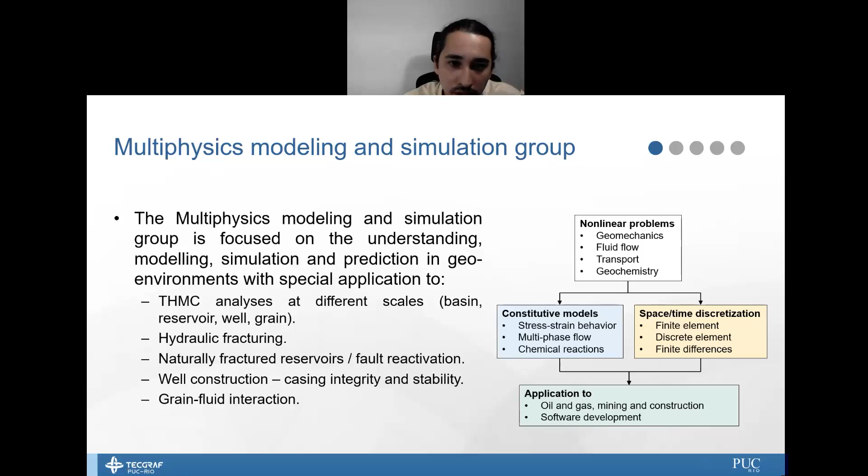So, moving to the topic of the lecture, hydrocarbon production triggers significant stress changes in the reservoir and surroundings, especially compaction, subsidence, and related problems. There are field problems related to that, and this scenario can be even more adverse in the case of karstified and naturally fractured carbonate reservoirs. This is the case of the pre-salt reservoirs.

These reservoirs have as cap rocks evaporitic formations and mainly salt rocks. Salt rocks present a meaningful creep behavior and very low, essentially no permeability, and they are useful as hydrocarbon barriers.

This is, let's say, a sign or an evidence of hydrocarbons when we find salt in the lithology, but also in storage medium, geological repositories. These capabilities, the creep and the very low permeability, make such rocks adequate candidates for geologic barriers in case of well abandonment.

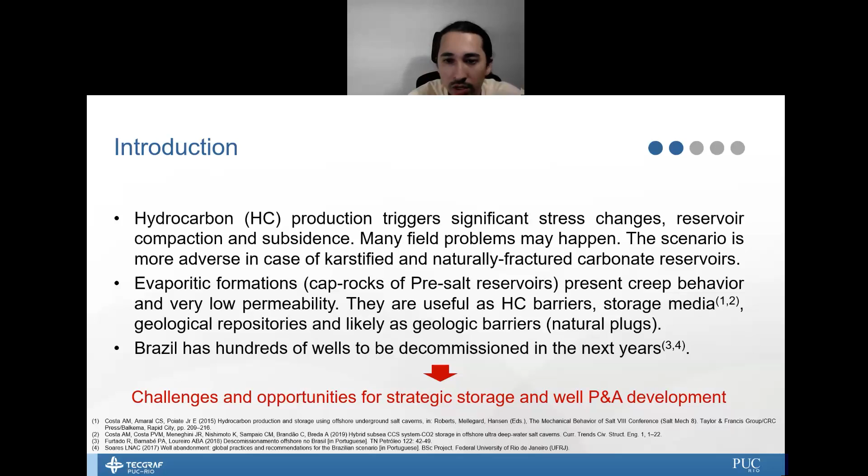So let's see some aspects on the multiphysical behavior of salt. We observe four main physics: the mechanical, thermal, hydraulic, and chemical. When we are talking about salt, we usually think of salt creep, so we are talking about the mechanical behavior of salt.

But this mechanical behavior depends on the thermal behavior also, because creep is thermally activated. So we have this coupled thermomechanical behavior. And considering that, we may have some repercussion on the hydraulic behavior when we are at a level of stresses and accumulated strains in which the volumetric strains are no longer negligible. So the rock undergoes dilatancy, microcracks open, and these open microcracks become flow pathways for fluids, and with that we have percolation.

With percolation, depending on the chemical compatibility between the salt grains and the percolating fluid, we may have reactive transport and dissolution. This is the way how, in general lines, the thermomechanical behavior relates to the hydraulic and the chemical behaviors.

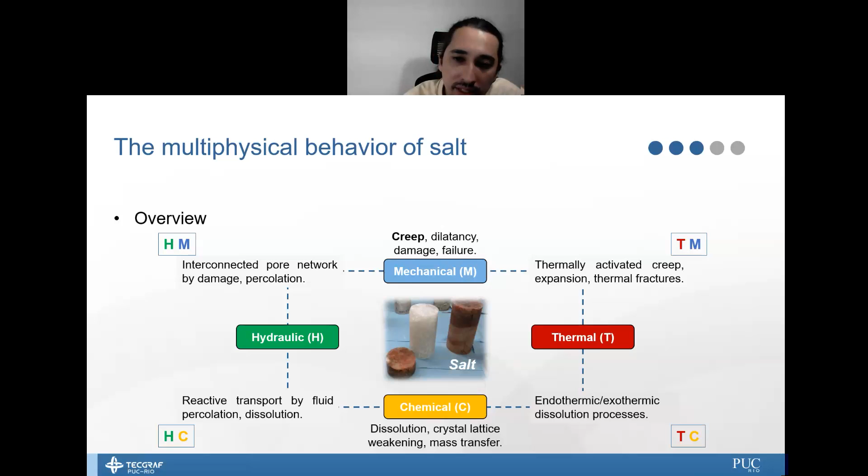But for the scope of the lecture, we are focused on the creep behavior and eventually the role that temperature plays on the creep behavior.

Considering the thermomechanical behavior of salt, our first observation is that mechanical behavior depends on deviatoric stresses, temperature, and time. So the constitutive models for creep need to consider stresses, temperature, and time.

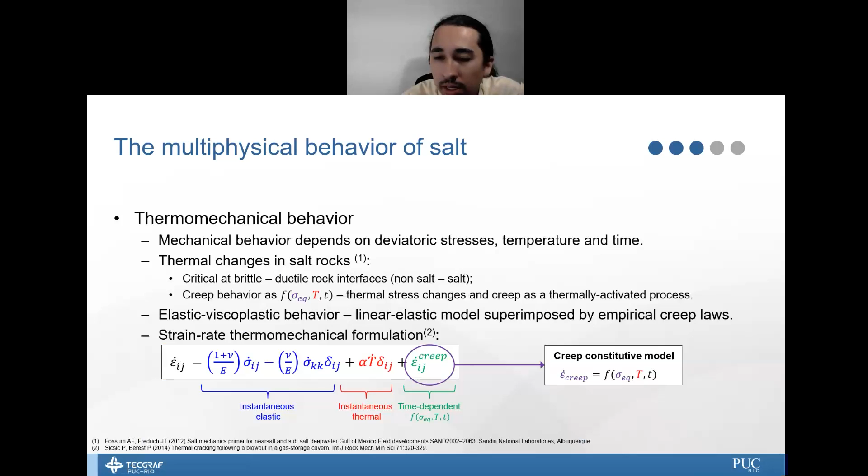The expression you see in the slide describes how strain rates are usually formulated in salt, considering a thermomechanical behavior. We observe there is an instantaneous elastic contribution, an instantaneous thermal contribution, and a time-dependent contribution. This time-dependent contribution is exactly the creep contribution, and it depends on the constitutive model we are adopting to formulate, or to quantify and predict, the creep deformation.

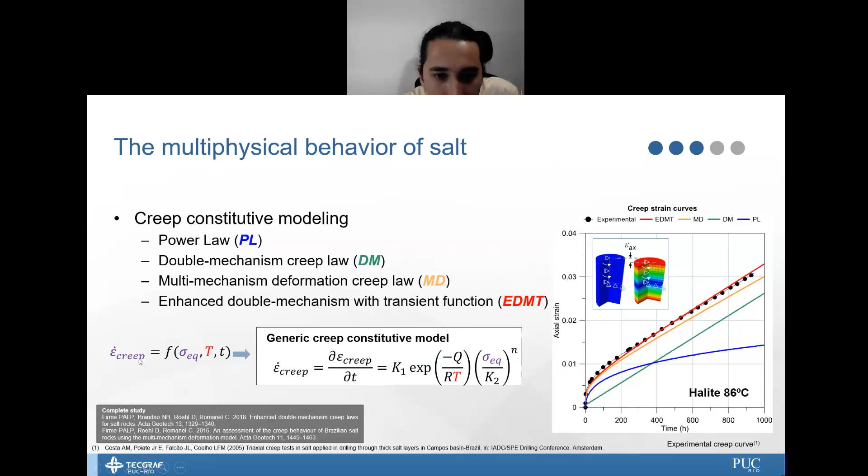Considering dilatancy behavior, which is crucial for the repercussion of the mechanical behavior on the hydraulic behavior, salt accumulates high creep strain levels before exhibiting macroscopic failure. But if volumetric strains become relevant, the material undergoes dilatancy, and this is why controlling dilatancy is important.

Once the salt undergoes dilatant behavior, there is the opening of existing microcracks and likely the generation of other microcracks, and there is an interconnected pore network that is responsible for enhancing the permeability. So salt is no longer impermeable. This is a problem considering salt as a medium with hydraulic isolation.

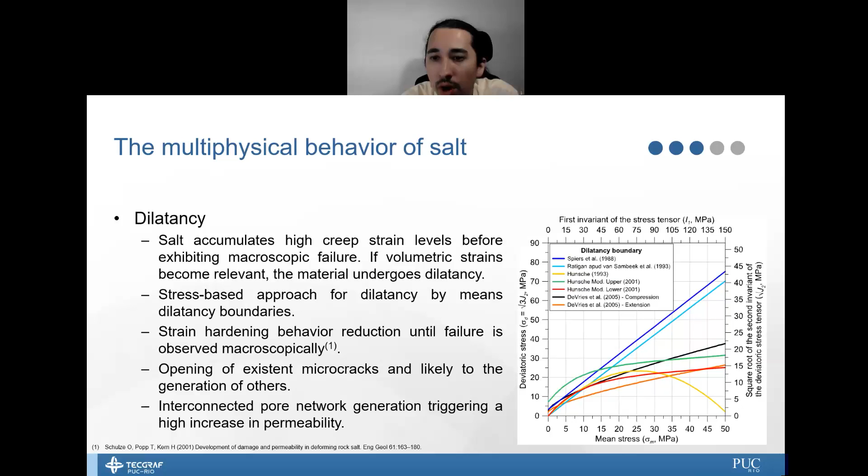So let's see some applications, starting with salt caverns. Firstly, there are some specifications that apply to all the models, results, and simulations presented in this lecture.

We are adopting the finite element method using the commercial software Abaqus, the enhanced double mechanism creep model, and either axisymmetric or 2D elements. We are not considering 3D analysis here, but in both cases we are adopting quadratic finite elements, 8-node quadratic and quadrilateral elements. There are some capabilities which are not originally available in the software.

So we had to prepare Fortran subroutines to make them available. We have prepared the EDMT creep model in a subroutine and a transient internal pressure to simulate the cavern construction and operation. These two capabilities we have coded and are using in Abaqus.

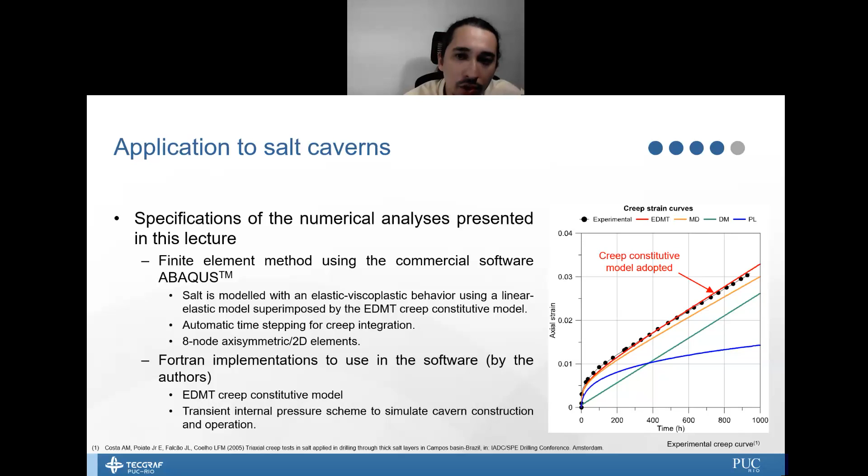Considering this model of salt cavern, the goal is to evaluate the mechanical response of an offshore synthetic model of a salt cavern regarding salt creep, dilatancy, and stress paths during construction and operation periods.

So we have a typical model considering a pre-salt lithology, and the cavern is opened by solution mining, which is a dissolution process, but we are modeling it here using a mechanical transient pressure. It is a simplification of the process, but it seems to be working well.

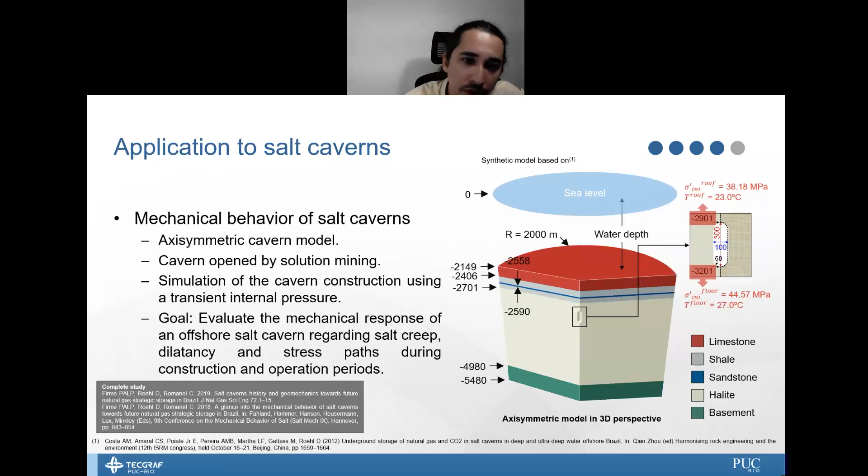And we are simulating the construction and operation periods of the cavern. Here we have a workflow to simulate the cavern construction. We are modeling the solution mining process using a mechanical equivalent approach.

So we have a transient pressure scheme that simulates the cavern opening, while reflecting the transition from salt to brine by dissolution. So this gradient of the pressure changes in order to reflect this dissolution process.

And then we have the debrining and first filling processes, which represent the brine being removed from the cavern and being replaced with gas at maximum pressure and then at minimum pressure. So in a few words, this is a workflow for a numerical simulation of cavern construction by solution mining using mechanical pressures.

And here we observe the stress changes provoked by this simplified solution mining representation of the cavern construction. In the end, we have a deviatoric stress of about 20 megapascals.

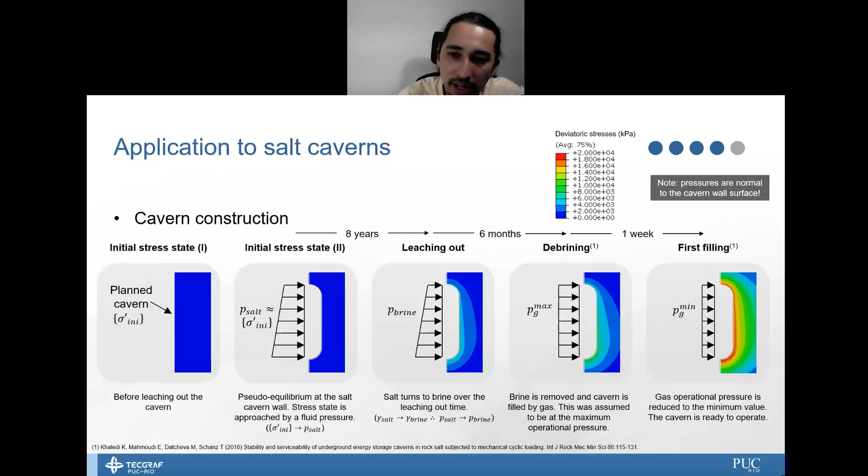So there is a perturbation. This is expected in the field since we are unconfining a significant region in the subsurface, and these deviatoric stresses are responsible for triggering the creep behavior of the cavern.

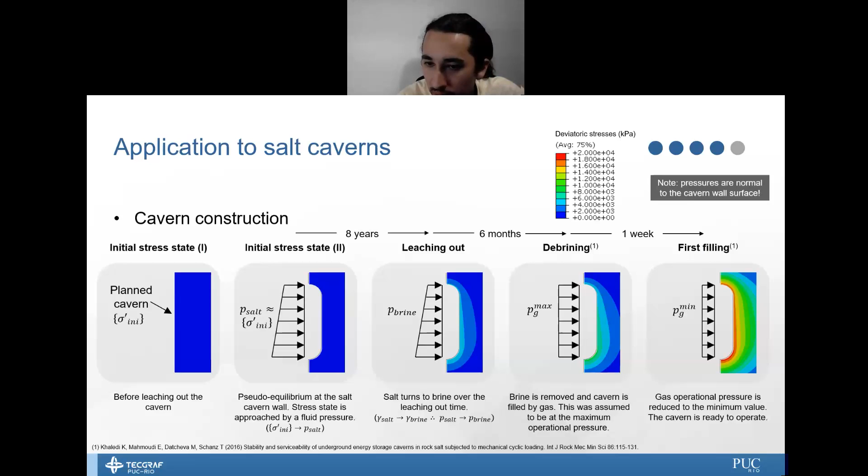One important thing when simulating the cavern mechanical behavior is controlling the internal pressures acting inside the cavern. So we have the internal pressures at the roof, at the halfway point, and on the floor of the cavern.

And we observe that as internal pressures decrease, deviatoric stresses increase. This is physically coherent. But what calls our attention is the strong decrease in the center plot of the slide, and we have the maximum stress deviation, which is critical for the mechanical integrity of the cavern.

But we observe that these two boxes, the blue box and the green box, are expressing how the internal pressures vary over the construction period of the cavern. And these internal pressures and the corresponding deviatoric stresses have to be checked with respect to plasticity envelopes or failure envelopes in general, so we have an idea if the cavern integrity is kept during this period.

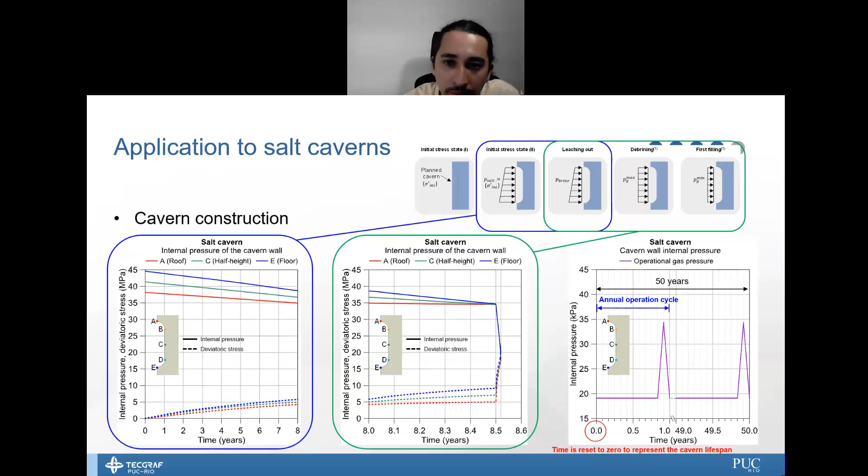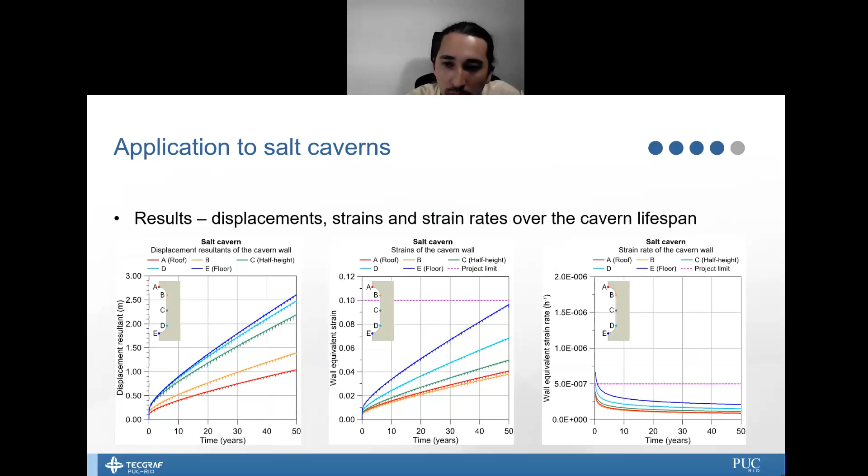And this cycle applies annually over 50 years. This is the lifespan we are simulating here. We have the displacements, the evolution of the displacements, of the strains, and of the strain rates of the cavern. And these results are fundamental for us to control the mechanical integrity of the cavern.

Considering well stability and integrity analysis, the goal is to predict the well closure by creep and compare these results with caliper logs, to see if our constitutive models for creep are producing results validated in relation to field results. So it's for us to check our representativeness.

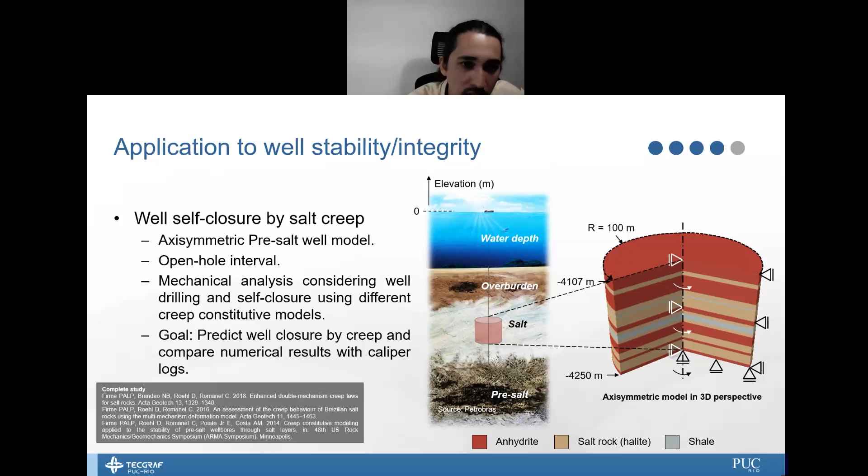So we have a typical pre-salt lithology involving salt and non-salt rocks, and we have an open hole interval. We simulated the creep behavior, the well closure, and the deviatoric stresses, and observed some problematic regions in the center figures, where well serviceability may be impaired if the well has these intervals of salt closure.

So these regions may be prone to stuck pipe or other operational problems. The regions between salt and non-salt layers, these interface regions, are prone to slip. These pictures show that we may have integrity problems in these interface zones prone to slip, and serviceability problems in the regions where we observe well closure in the salt layers.

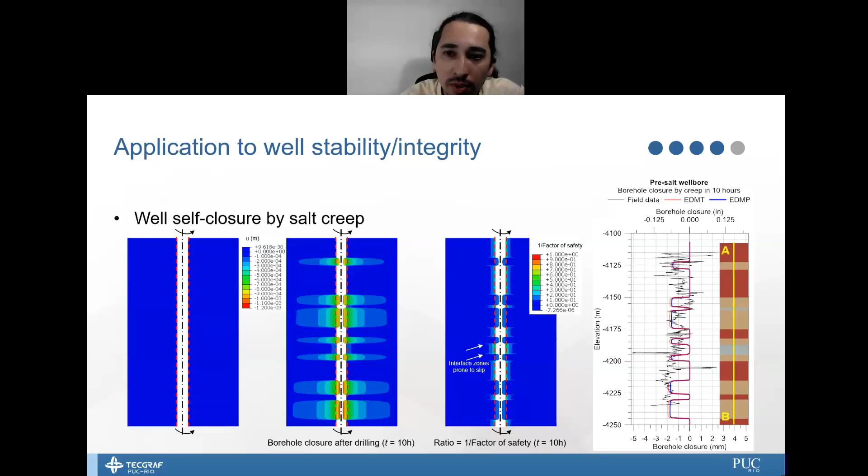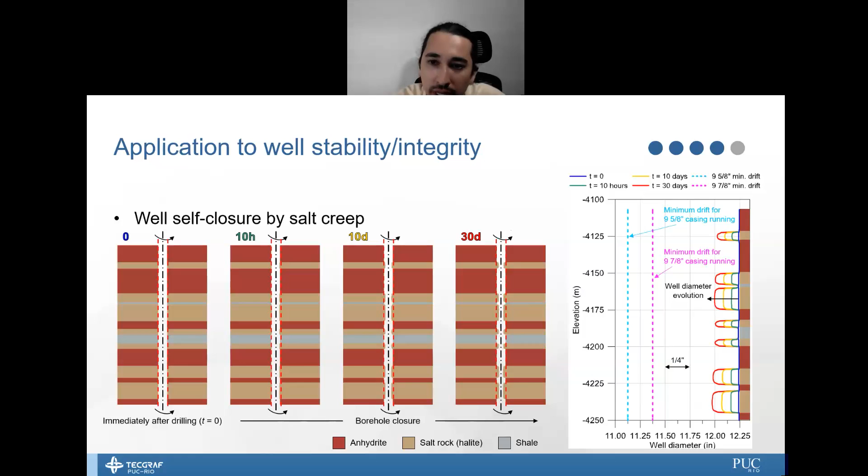Comparing results of well closure, we are somehow in line with the field data. Here are some useful results for the industry, to ensure that we keep a minimum drift allowing casing to be run along the well.

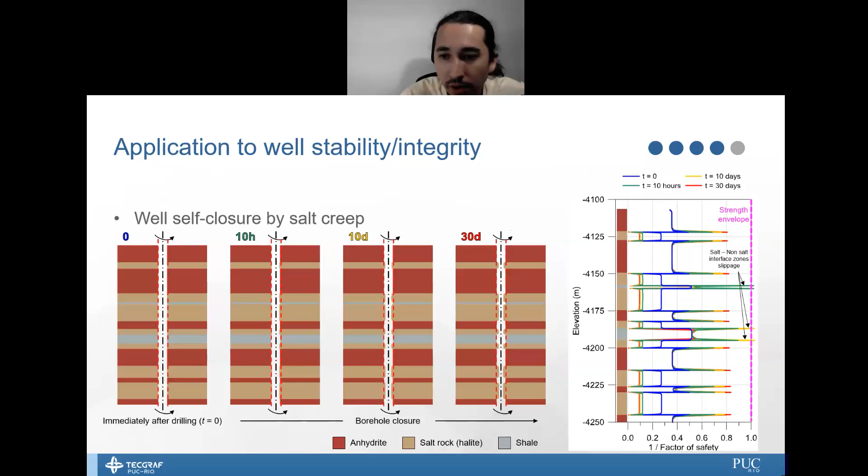And here we have some problematic interface zones with peaks in the factor of safety. So these zones need to be checked in terms of integrity. If we have slippage in these zones, we may have pathways for fluid leakage, and therefore problems in the hydraulic isolation of the well.

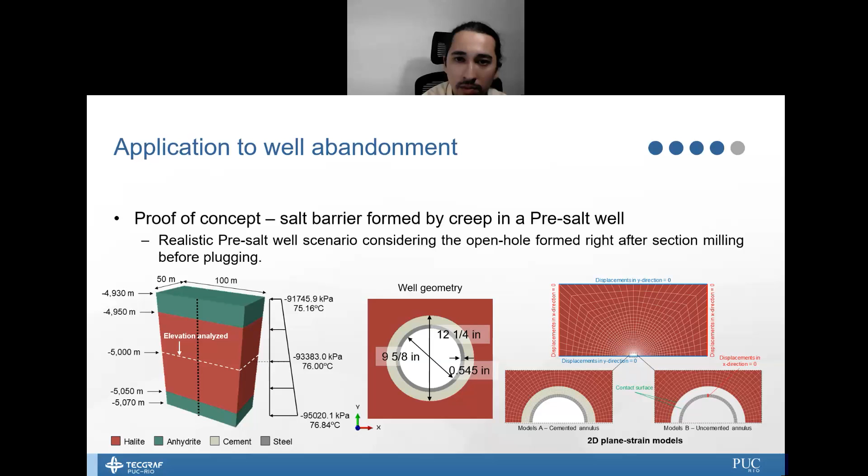And finally, we have well abandonment applications. Here, creep is not a problem, but actually it is a solution for the closure of the well, thinking of it as a geologic barrier for well abandonment. So we want the well to close by itself through salt creep.

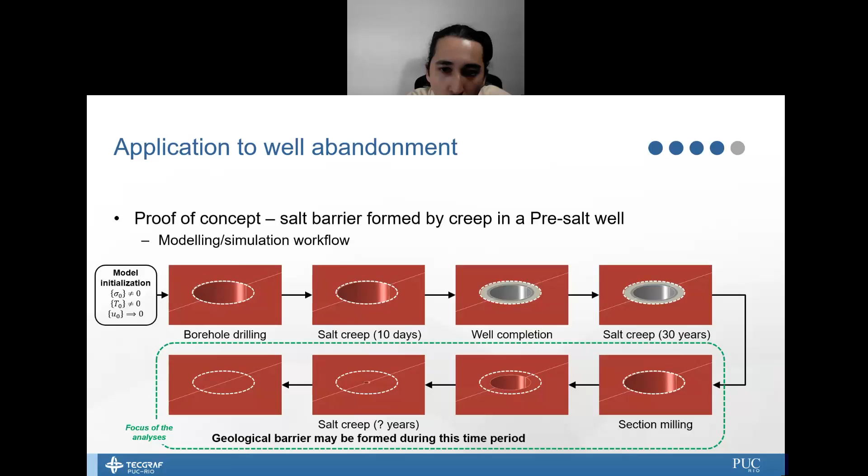So we have carried out some proof of concept analysis focusing on the well closure after the lifespan is reached. We simulate the removal of the casing and the cement and leave the well free to creep and close the hole.

We are considering a reference model and models where the creep behavior is stimulated by pressure reduction inside the well and by heating the well, because pressure reduction affects the stresses, and temperature is another state variable important for creep behavior. So we are trying to see how some stimulation methods are effective for achieving quick well closure.

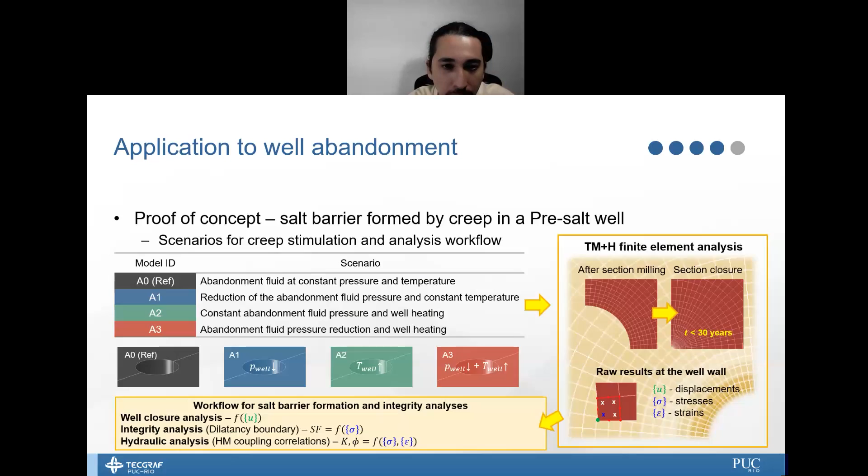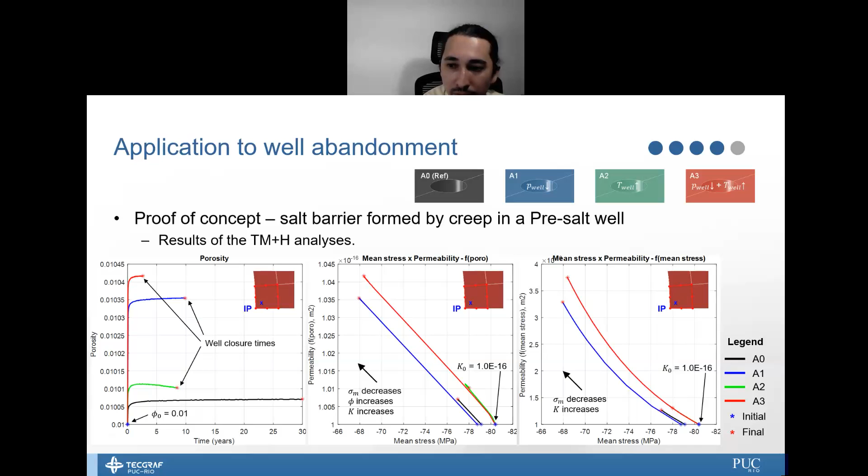We observe that we are okay regarding the factor of safety, far from the dilatancy envelope, so we don't have integrity problems over this closure period. Here we also observe the evolution of porosity and permeability over time and over mean stresses, because the geologic barrier needs to be mechanically sound, and permeability and porosity have to evolve to negligible values.

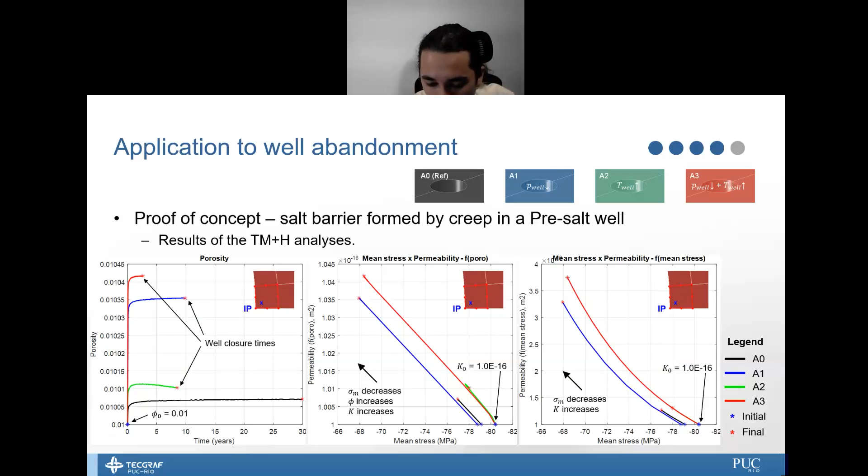So in this way, we prove that we have hydraulic isolation of the well using the material of the host rock. So we have chemical compatibility between the barrier and the host rock of the well, and this is the best case for an abandonment.

Moving to the final remarks, this lecture has covered key aspects of the mechanical behavior of salt rocks of interest for engineering work such as caverns and wells. Salt properties such as creep and essentially null permeability are useful for casting competent hydrocarbon traps, for storage environments, and good for geologic barriers for well abandonment.

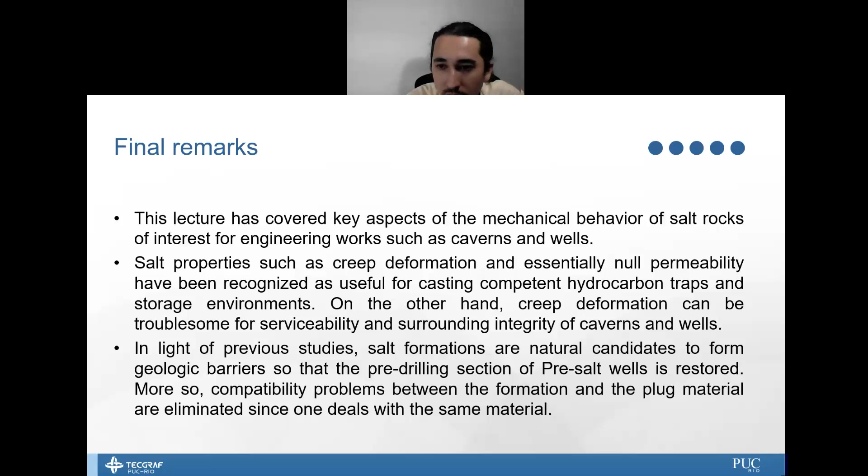On the other hand, creep deformation may be troublesome for serviceability and surrounding integrity of caverns and wells. Using salt as a geologic barrier for well abandonment is advantageous considering we have compatibility between materials, and we eliminate compatibility problems between salt rock host formation and a cement plug, for instance.